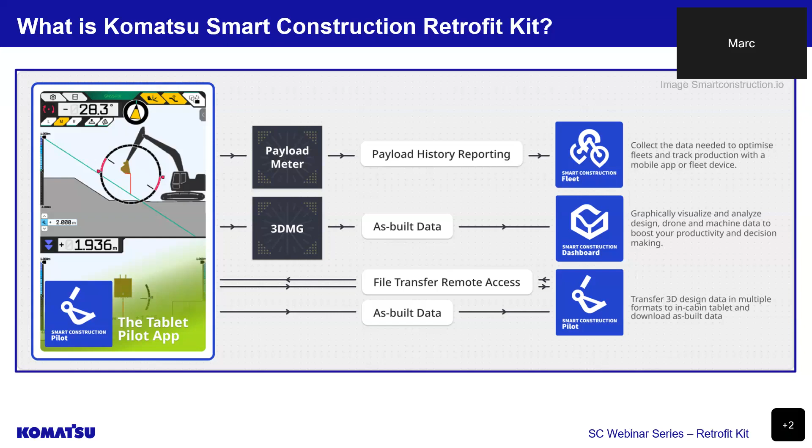From obtaining and collecting data on the machine itself, we're able to provide a history of payload reporting as well as 3D as-built data directly to the server for visualization and processing. Using Smart Construction Pilot Web and Smart Construction Remote applications, we're also able to remotely access the machine for support when required, as well as convert and transfer design data directly from the office straight to the machine.

First and foremost, the system is a fully functional 3D GNSS guidance system, or GPS system, allowing the operator to visually dig to both 2D and 3D line work and 3D surface plans, replacing paper plans, pegs, and string lines in most applications.

Secondly, the system also supports an integrated payload monitoring and reporting system that can help users to load and track material more effectively. The remote management tools allow for remote viewing and controlling the display when required, and importantly, as I previously mentioned, we're able to convert the design data from some common formats, including Topcon, Trimble, AutoCAD. We're able to send them directly to the display with the included mobile modem.

Lastly, a modern feature that is becoming far more commonly requested now is the ability for the system to be able to report on as-constructed data throughout the day's operation, which can be loaded into our data visualization and reporting product called Smart Construction Dashboard, or it can also be exported as raw data for digital twin type applications.

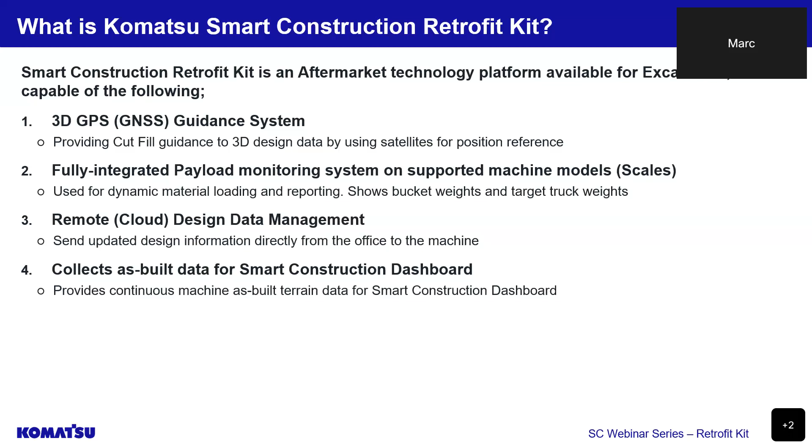Now we're going to drill down into the features, kicking off with the 3D guidance functionality. So those in here that have used machine control and guidance technology in the past will already be familiar with most of the benefits listed on this page. And whilst the fundamental benefits of 3D guidance are shared across the board with Komatsu's IMC, as well as competitor solutions, Smart Construction Retrofit can provide these benefits at a price point where the time to get a complete return on your investment is greatly reduced.

The Smart Construction Retrofit systems put the 3D digitalized plans at the operator's fingertips. This allows the operator to get clear and real-time feedback of the machine's position, or more importantly, the cutting-edge position, against the digital surface and line work. Whilst a control system like IMC will provide automatic hydraulic protection against things like over-digging, the Smart Construction Retrofit system provides visual or audible indication to the operator, which still substantially reduces the risk of over-digging and needing to carry out any rework. It also reduces the material and haulage costs.

A big cost saving that is a lot easier to measure is the system's ability to significantly reduce the survey costs on site, with a large portion of the excavation works and trimming being able to be carried out without the use of pegs, paint, and string lines, with the use of the RTK system. Spend more time moving dirt and less time waiting for the surveyors to turn up on site.

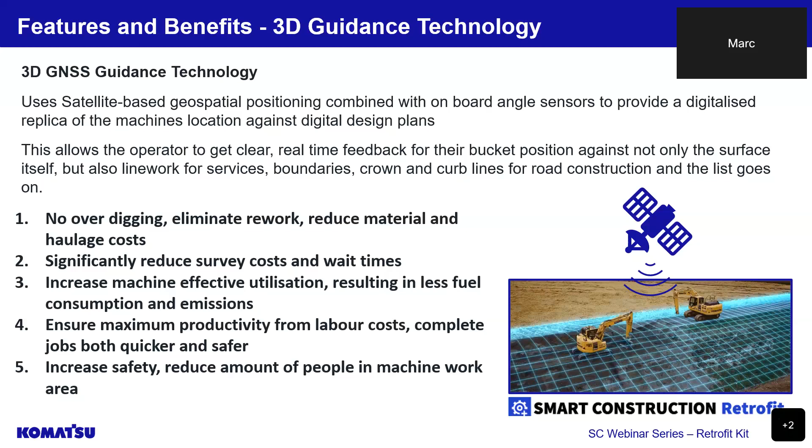We see the payload management system as a critical value add to supplement the 3D guidance system, especially at this price point. The integrated payload system on the Retrofit Kit results in less cab clutter by displaying all the payload functions on the same user interface as the 3D guidance.

The payload system is a dynamic material loading system that uses hydraulic pressure sensors as well as the IMU sensors on the arm to calculate and display per bucket and per vehicle weights, ensuring that vehicles are being loaded to their full potential every load cycle. Later in the presentation, I've got a short video that will demonstrate the use of the payload system.

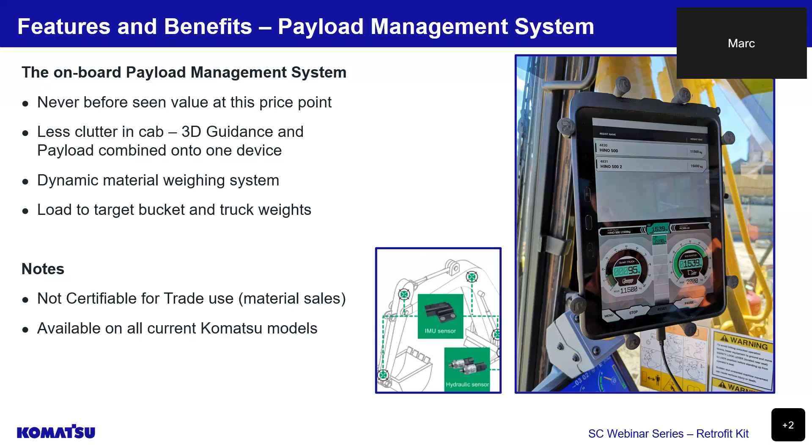Smart Construction Retrofit Kit features a remote management interface called Smart Construction Pilot Web. This tool can be accessed via any browser like that on a PC or mobile device, or actually even on the Retrofit tablet itself. It essentially actively syncs updated information from the controller, such as calibration information for things like the attachments and machine measurements. It also logs system error codes, construction history, as-built data, or any points that are manually saved by the operator. It syncs those directly from the machine to the server automatically.

But the most common use of Smart Construction Pilot Web is actually to upload and convert the project file data, usually the engineered 3D surface and line work, which can then be either downloaded from the application and put onto a USB drive and loaded into the machine the traditional sort of way.

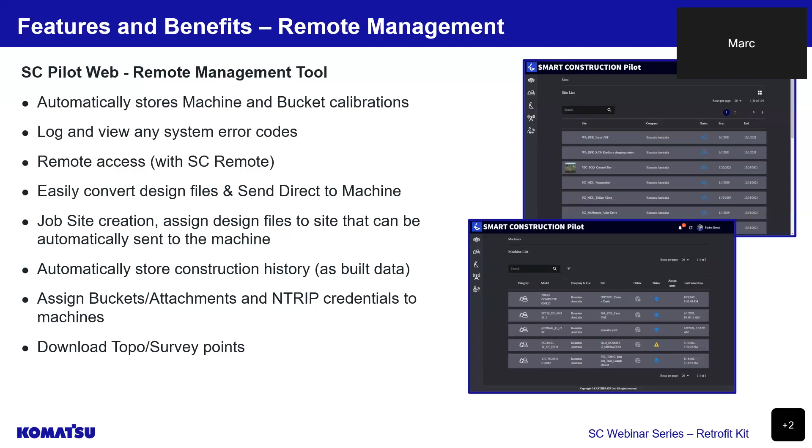But alternatively, a powerful feature here is the ability to send the data directly to the tablet from the web app. And once that data gets received by the tablet, the operator will get a notification to say that new design data has been received. Would they like to switch to the new project, to which they can acknowledge yes or no. When working in busy environments, this feature is key to ensure that the most current design data is available and being used to prevent the risk of mistakes or delays.

We have quite a number of IMC customers out there utilising our industry-leading as-built collection capabilities with that product, all of which are very happy with the data and benefit that this solution provides, but previously this was limited to IMC machines only. With the introduction of the Smart Construction Retrofit Kit, users are able to enable the collection of construction history or as-built data from any machine that's fitted with the retrofit kit. This data can be essential to reducing survey and planning costs during the construction phase.

Smart Construction Dashboard is a powerful tool that will be on showcase in our next webinar in this series. But if you already have an existing digital twin application in mind, the data can be exported directly out of Smart Construction Pilot Web in a CSV format.

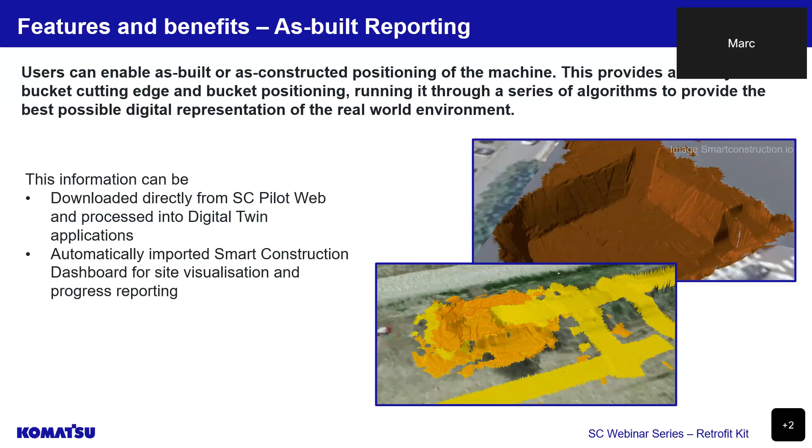Smart Construction Dashboard is our cloud-based site virtualization tool that can be used for tracking construction progress by comparing engineered design data against real-world data through the use of traditional surveying methods, drone surveys, and in this case, machine as-built data collection. Our next webinar will focus on Smart Construction Dashboard in greater detail, but in summary, the retrofit kit will allow non-IMC and non-Komatsu machines to track progress information, which can automatically be sent directly from their machines to the server.

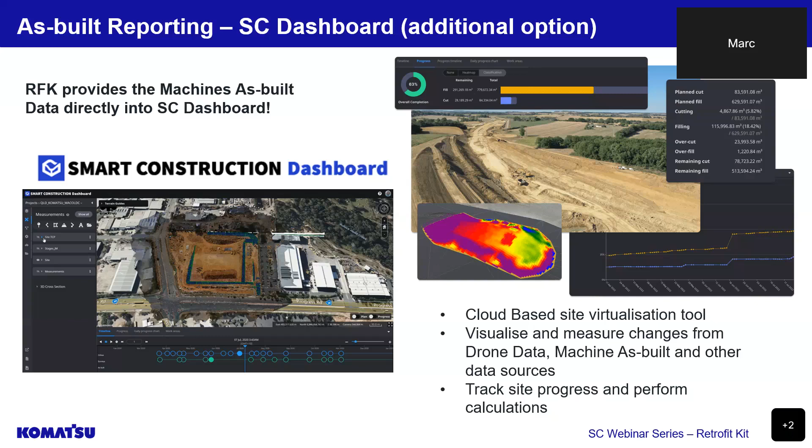So a lot of people ask us, what is the difference between IMC and the retrofit kit? Well, the core difference between these two systems is that the integration portion of the IMC solution allows it to be what's referred to as a machine control system, capable of controlling the hydraulics of the machine to provide various assistance features to the operator. Whereas our retrofit kit behaves more like a traditional excavator guidance system, where the operator remains in control of the machine and cuts to grade using visual or audible indicators.

The IMC system uses factory integrated components such as cylinder positioning sensors, and therefore is only available on very specific machine models. Whereas the retrofit kit uses bolt-on aftermarket components, and as such, it's able to be installed onto a larger variety of machine types, makes, and models.

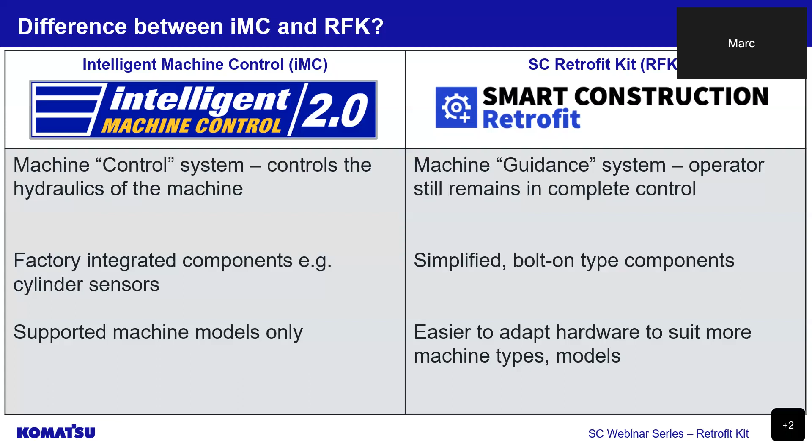It's important to understand that both products have their place at various phases of the construction project. Contractors that experience difficulty in obtaining skilled labor, such as with the ability to trim effectively to tight tolerances, may benefit from an IMC control system. But the retrofit kit will provide accuracy that's identical to that of an IMC system, just requiring manual operator input.

So based on the previous slide, you might start to wonder, why would Komatsu get involved in making a 3D guidance system when we already have factory integrated options available? Well, the answer is quite simple. As we continue to progress into the digitalization of the construction industry, we've identified that as much as we would like every machine on site to be Komatsu yellow, mixed fleets are here to stay, and Komatsu recognizes this. So in turn, we've developed a system that allows contractors to achieve huge digitalization benefits that were previously only available on Komatsu IMC machines across their entire excavator fleet.

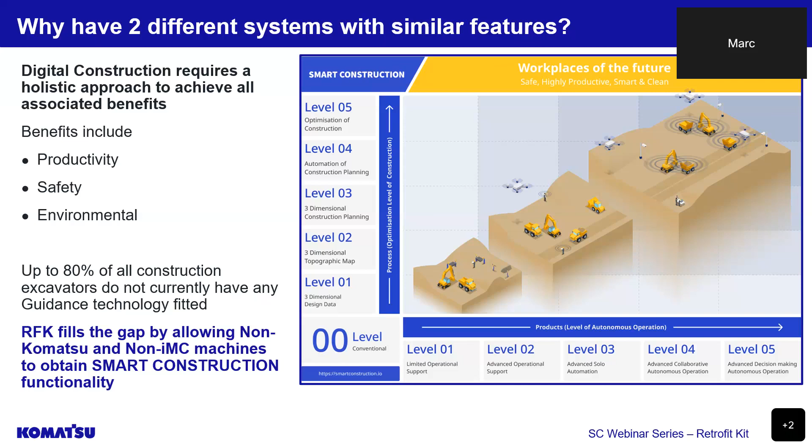So what is digital construction? Well, to summarize, it's an evolving shift from traditional construction practices towards the more sustainable and modern practices seen across other industries. For example, in construction and particularly earth moving, we've often lagged behind other industries such as manufacturing, logistics, and so forth when it comes to innovation and acceptance of new technologies and processes.

On this slide, you can see where retrofit fits into the equation during the execution stages of a project through to finalization, allowing operators to complete their work more effectively while being able to provide up-to-date progress reports through the as-built data reporting functionality. If it all sounds a bit complicated, well, truthfully it is, but smart construction provides simplified solutions to complex problems.

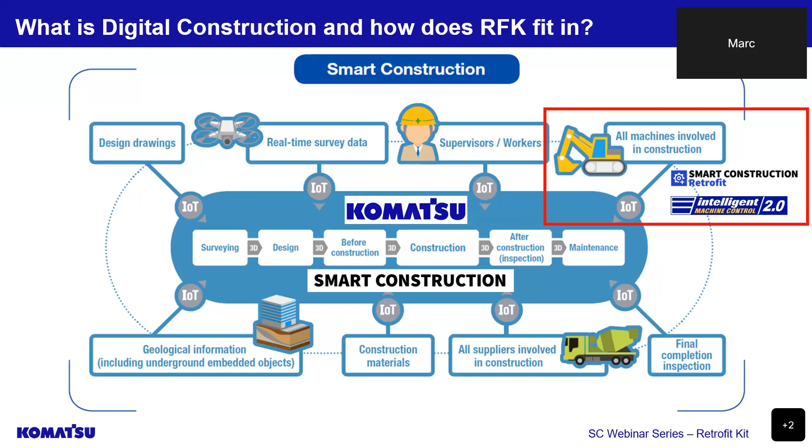Now we'll move on to an overview of new and used Komatsu machines that can be fitted with our Smart Construction retrofit system at special promotional pricing. The system is also designed to be installed onto various other machine manufacturers, and this Komatsu model sizing chart shows where the product is currently available in Australia and New Zealand.

As a general rule of thumb, we're supporting installations from 13-ton up to 36-ton class machines, but we will be expanding installation options to include larger bulk earth moving excavators, smaller utility excavators, and other machine brands in the near future. The payload monitoring function is available on all current Komatsu models shown in this slide.

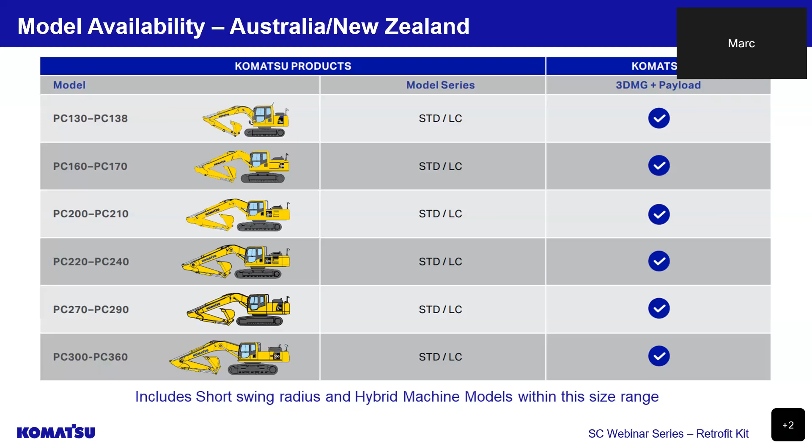Smart Construction RFK system utilizes high accuracy tested and proven components to achieve cutting edge accuracy for a fraction of the cost of market competitors. The image on this slide shows an overview of roughly where the components of the RFK system are fitted onto the machine.

Some attendees might be familiar with using 2D or laser guidance for their excavating. And whilst laser grading systems can provide benefits in some applications, the flexibility and convenience of a 3D GNSS system can be worth its weight in gold. By using the high accuracy GNSS signals to the antennas mounted at the rear, the machine is able to freely move around the job site with accurate cut fill leveling guidance without needing to constantly rebench or recreate the slope or design.

And while a connection to a base station via radio or cellular signal is still required, generally the risk of damage or theft to external supporting hardware such as lasers is mostly eliminated. The high accuracy RTK position is then projected down the boom to the cutting edge using the high-speed IMU sensors, which account for the varying arm position, meaning that your cut fill values will be accurate with the machine positioned essentially anywhere within practical and safe operation, of course.

The IMU sensor data and GNSS signal data are processed on the controller unit, which can be located outside the cab because it uses Wi-Fi to communicate. This significantly reduces the risk of cable damage causing downtime and also declutters the cab as much as possible. The GNSS receiver is capable of tracking all the common constellations available: American, Russian, European, Chinese, Japanese satellites, all available at no extra cost.

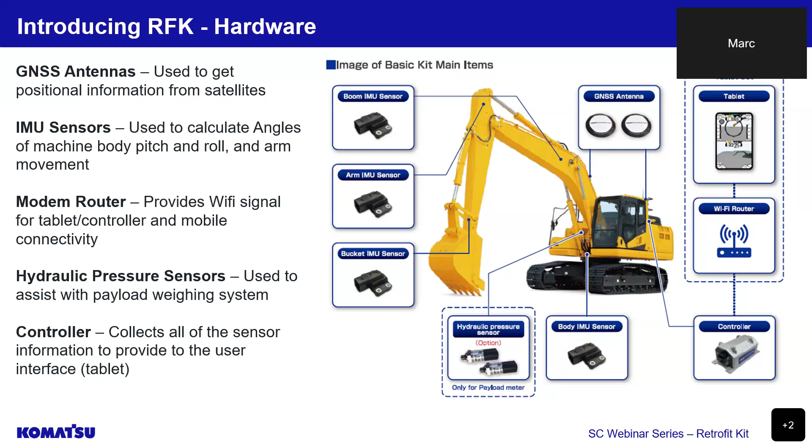Lastly, on the hardware side, but importantly, we have the operator's in-cab display, which is actually just a ruggedized Android tablet device. The tablet device was selected for a few reasons. First of all, ease of use. Most people are familiar with operating smartphones. This solution provides a very similar look and feel to most operators, which reduces the training time for the hardware itself so that operators can focus their attention on learning the software functions.

The tablet also has the added benefit of communicating wirelessly to the rest of the system, which means the tablet can easily be removed at the end of shift and data can be loaded directly into the tablet back at the office if required. It has good brightness for in-cab visibility and internal speakers, which can be used for audible grade tones.

Another benefit, which isn't actually often mentioned, is that the replacement cost of the Android rugged display is about 1/10 of that of some market competitors, meaning that when accidents happen, like theft or vandalism, you're left far less out of pocket to get back up and running again. It is, of course, a rugged device, but believe me when I say that no screen will survive being run over by excavator tracks. I've seen it happen too many times, unfortunately.

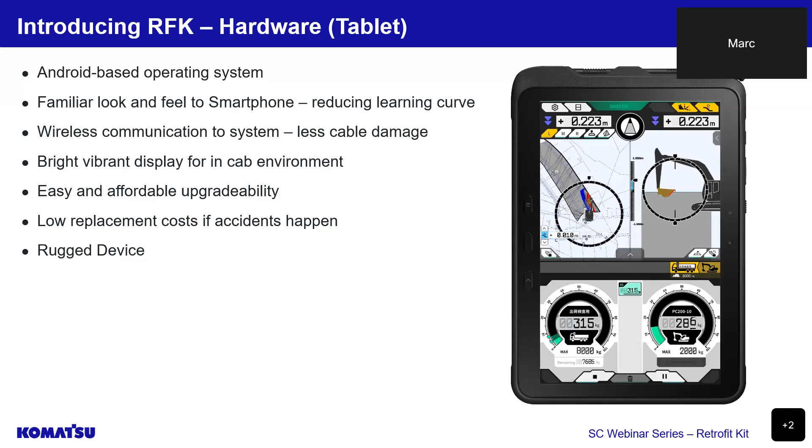So as great as all the hardware may sound, no system is complete without an easy-to-use, reliable user interface for the operator to work from. In fact, as the competitive landscape in the 3D machine guidance market continues to heat up, the software usability and features are what operators are becoming drawn towards the most. You want software that has a short learning curve, powerful but easy to use functions, and easy access to these functions without having to scroll through menu after menu.

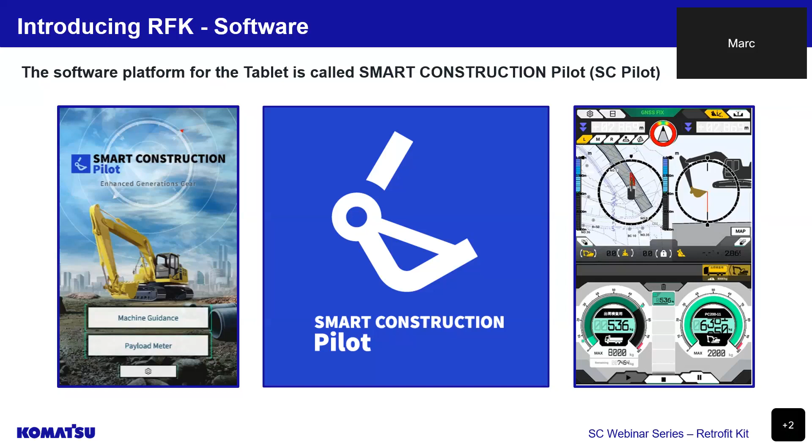Technology utilization has a direct relationship to the usability of the software. So Komatsu and Smart Construction have put a lot of effort into the design of the user interface. I won't spend too much time going through all these functions and features one by one, but the main thing to note from this slide is that the most common features and functions required from an operator when using the system are actually within one button press of the main screen. Too many menus and options and features creates a lot of confusion, and in some cases actually causes hesitation in adopting and using the technology.

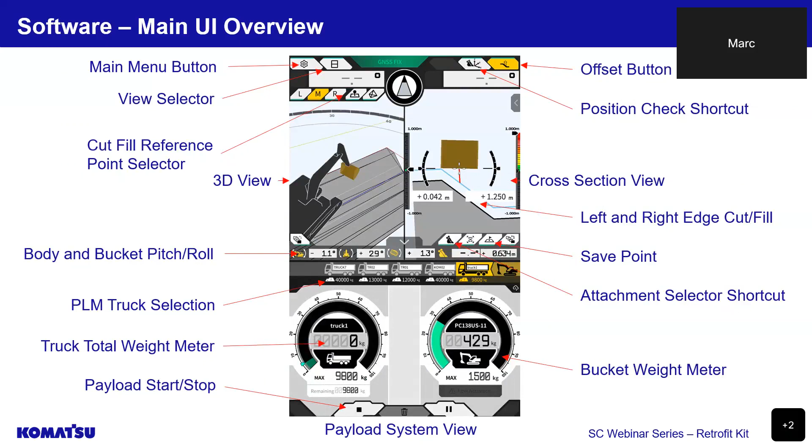For those wondering, we do offer the ability to show the payload system in full screen, also the ability to remove the payload pane from the 3D guidance screen, which results in larger and easier to read interfaces depending on the task at hand. It's very easy to switch between these display modes with just a single button shortcut on

the main screen. The colors of the line work and the surface can also be changed in the project settings, and the line work can be colorized as per standard survey set out color codes. It can also be viewed in 3D, which can be useful for mapping underground utilities.

You can see on the right-hand side, there's an example of a dual screen view with a cross-section up the top and profile view down the bottom. The cross-section view features left and right cut-fill light bars, left and right cutting-edge light bars, which can be scaled in size to make it easier for viewing.

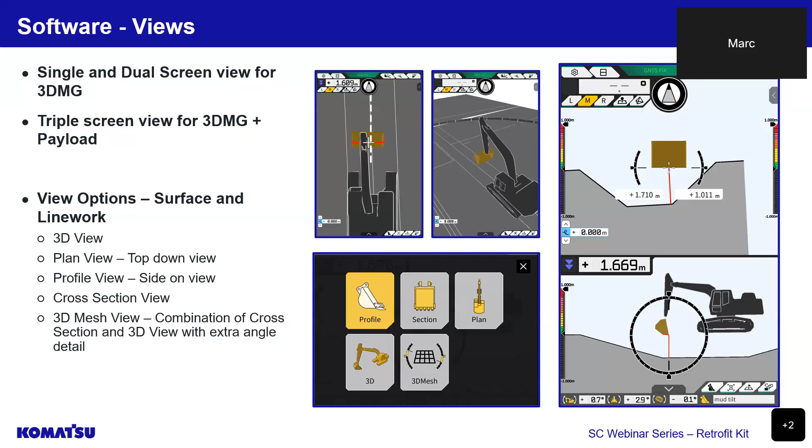The cut-fill information is displayed clearly for the left and the right side bucket edge on cross-section view, but also in larger text in the middle of the screen with an up or down arrow indicator. The surface can be offset either directly vertical or perpendicular to the design surface and will depend on the application.

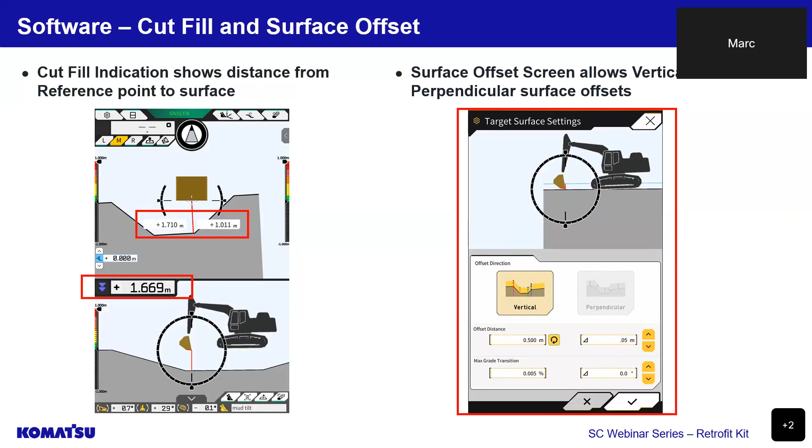Surface offsets are often used to avoid using multiple surface layers for tasks like boxing out roads, removing topsoil, and so forth. And the vertical offset moves the design surface up or down according to the operator's specifications.

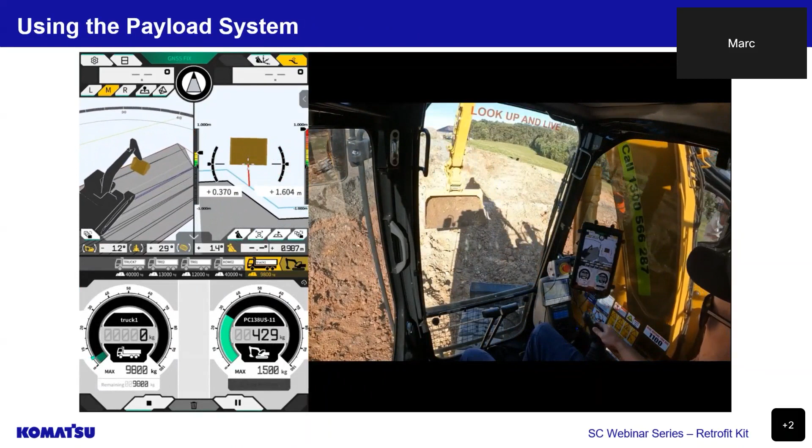This quick video demonstrates how the payload system can track bucket and truck loads on the same interface. In the middle of the screen, there is a vehicle or truck selector. Just tap the name of the vehicle and the target weight will be updated and shown on the left-hand lower side of the truck weight meter.

Sorry. The right-hand meter shows the individual bucket weight against maximum weight capacity of the bucket, and these parameters can be defined in the settings menu. As the boom is lifted, the bucket weight is calculated, and once the load is tipped off, the system will automatically register that bucket load to that vehicle.

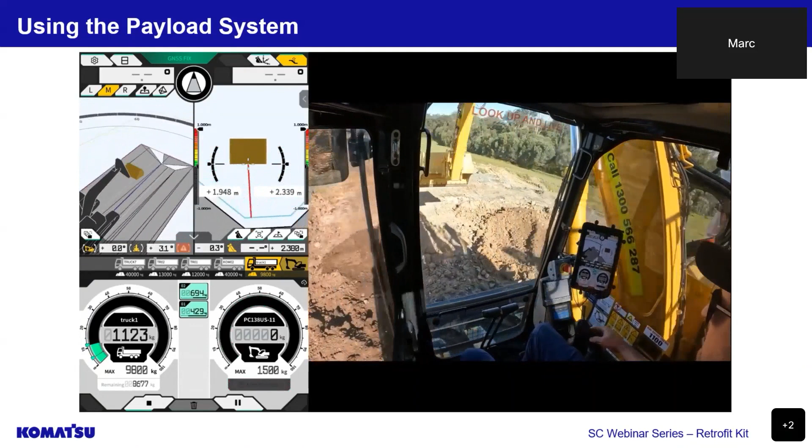The payload information is then uploaded to Smart Construction Fleet Lite server as soon as the vehicle load is finalized using the stop button. Using the Smart Construction Fleet Lite app, the vehicle weights are able to be displayed directly on the web interface, or they can be downloaded into a simple CSV format for import into any third-party applications if required. The data, of course, can be filtered and sorted by the parameters shown in those overlays.

The screenshot might be a little bit hard to see on the presentation, but the Smart Construction Fleet Lite app is very easy to use and can also be used to configure the truck parameters, which then get synced from the web app to the operator's tablet.

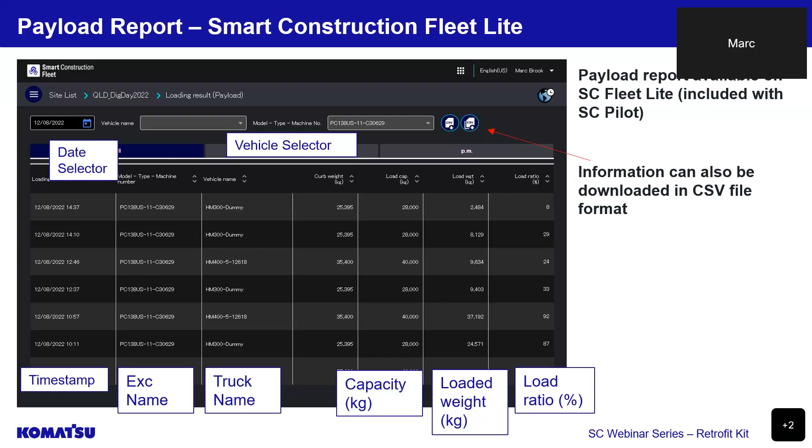We have a few additional hardware options available for RFK at the moment, and these items are at additional cost on top of the base machine kit. The UHF radio option is required for any machines running off a local base station running a UHF radio. The base system will support network corrections only, and if you need a radio, you'll need to include this option.

If you don't know if you need a radio, the supervisor or the survey team on site should be able to provide some advice here. It will save you a few $1,000s if you don't need it, but I'd usually recommend getting this option as standard if your machine tends to move around a lot.

The tilt bucket and tilt hitch kits are additional IMU sensor, cabling, and bracketry that are required to obtain the accurate cutting edge position when tilting the bucket. This will ensure your bucket position is always on the money for slope and batter work.

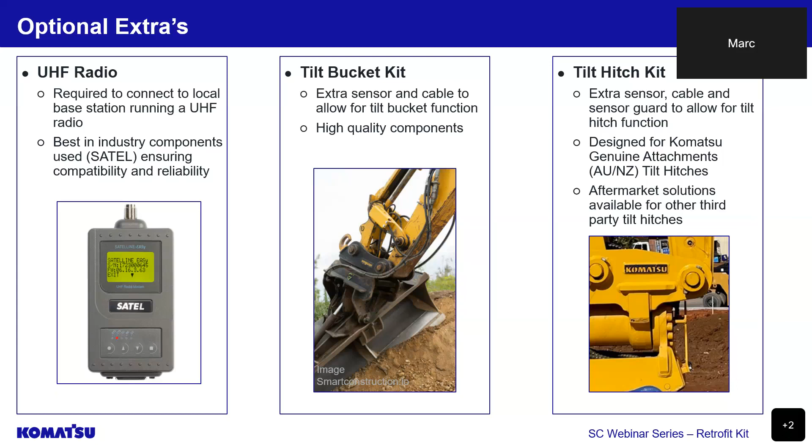If you're completely new to this technology side, it's definitely a lot to take in. But with Smart Construction Solutions, we try to make everything as simple and intuitive as possible.

To get a high precision position, you'll need to connect to a base station, whether via the UHF radio option we just discussed, or using an NTRIP network. If you don't know where to start, our team can help point you in the right direction when it comes to base station connectivity. You'll also need some machine-ready design data, which usually comes in raw form like AutoCAD data, and preferably excess detail should be removed from these design plans, things like excess landscaping information and irrelevant line work, just to clear things up for the operator a little bit.

The design data will also be made in a specific coordinate system, which must be known. We support most common projections and geoids, and we can also convert Topcon and Trimble localization files for use when required.

At a bare minimum, if you're connected to a base station, you're able to create flat and sloping plane surfaces, using the bucket position as a reference point. This is very useful for completing tasks where the engineered design data may not yet be available.

If you're looking at the slide and you're new to the technology and thinking this is way too complicated, where do I even begin? This is why we include 12 months of gold phone support through our dedicated Smart Construction Support Centre on all RFK system purchases. We're here to help, and we have some absolute wizards on the phones that can help support you when you need it the most.

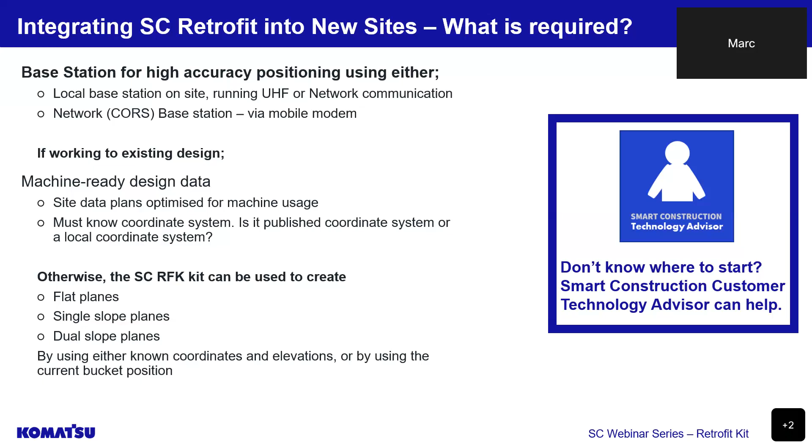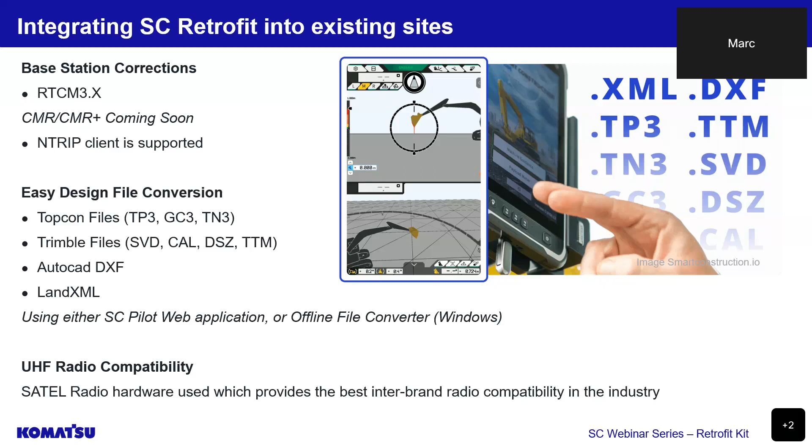The Satel UHF radio option that we discussed earlier is by far the best in the industry option for base station connectivity and compatibility across the board. But technically, the system will support any radio with a serial output. So if 900 megahertz is required for your site, our team can help you get up and running.

As part of our commitment to providing the best aftermarket product support for our customers, our team visited Brett Evans in the Hidden Valley Estate in North Queensland. Brett purchased a used PC200-8 fitted with Retrofit kit and was one of our initial customers to commit to the technology investment of our Retrofit kit in this region. More than 6 months after taking delivery of the machine, let's hear what Brett has to say.

Hi, my name's Brett Evans. I'm from Hidden Valley Estate, and we're up here with our PC200 in the heart of the Whitsundays. Hidden Valley is a rural residential subdivision located between Airlie Beach and Proserpine. We've been planning this estate for the last 20 years, with our first stage developed in 2019. We made the decision to form our own construction team so that we could build the stages ourselves, and we purchased the PC200 with the Retrofit GPS, which formed part of our fleet.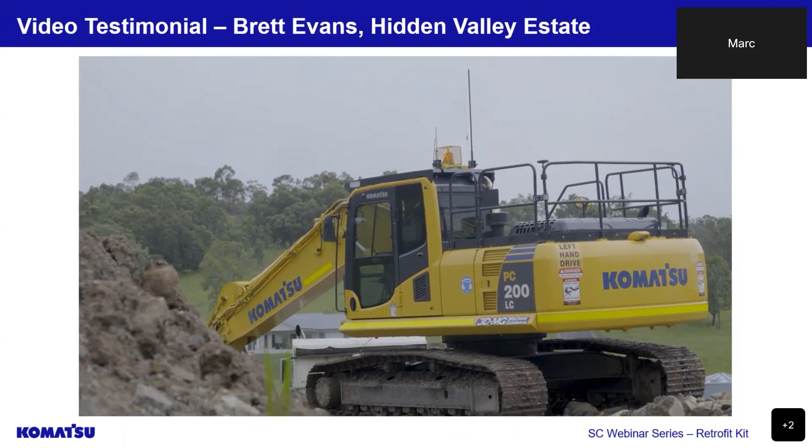The features of Hidden Valley is it adjoins Conway National Park, which has its own constraints, being the terrain and the vegetation. Having one of the oldest fig trees in Australia, it's in our best interest to look after not just a national park, but our estate, and having the PC200, the Retrofit GPS kit, enables us to have the confidence and a level of accuracy that we can construct in these areas without requiring a full-time surveyor on site. We are quite remote out here, but from when we fire up the machine in the morning, the system's ready to go.

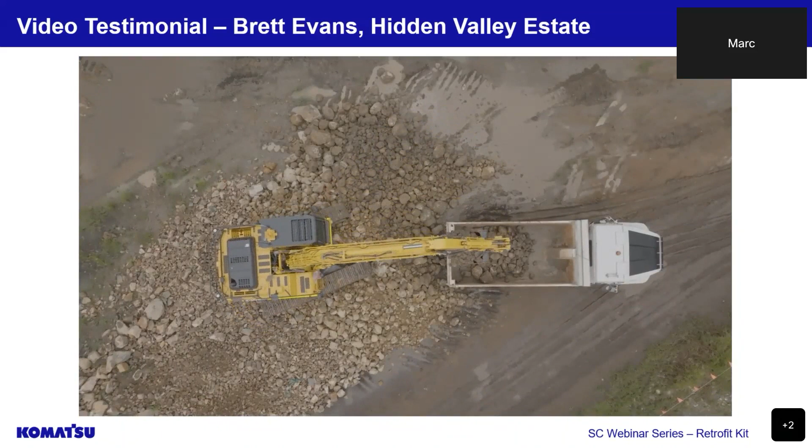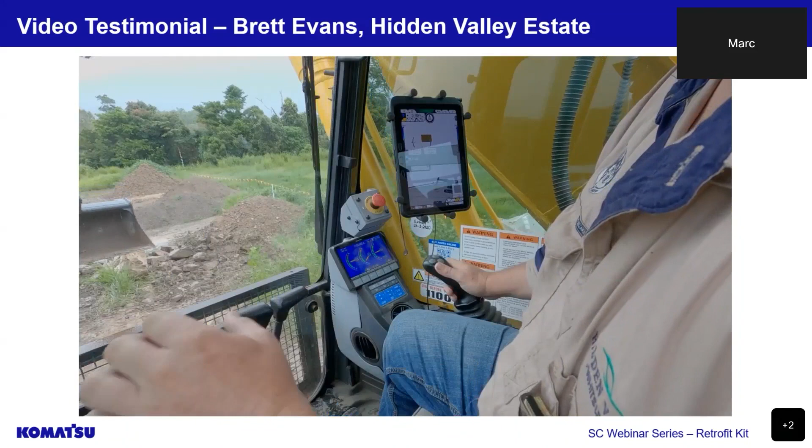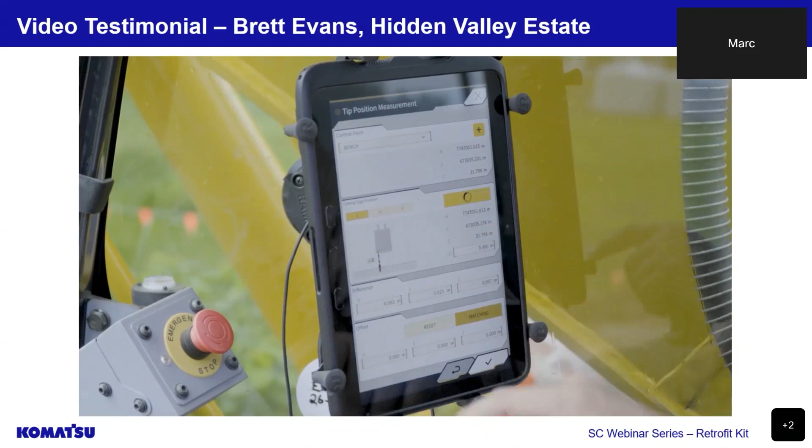Having the Smart Construction Retrofit allows our operators to achieve millimetre accuracy in all parts of our operation, including trimming, positioning and benching. The PC200 is the perfect machine for us to tackle site cuts, drainage, access roads and a wide range of other unique works within our estate. Having the PC200 with the Smart Construction Retrofit allows us to run a small crew without having to have string lines, pegs and other survey requirements that can all be done from the machine.

The main benefit with this system is time, from the auto tip-off feature when loading trucks, to productivity and efficiencies. In an area where we do have poor service, the connectivity is always great.

We've chosen Komatsu for its reliability, but in the rare instance where we do have issues, we know we've got the support from our local Komatsu team, and the machine has the ability for the Komatsu team to log in remotely to identify and address any issues. I know our team can pick up the phone anytime and speak to someone from Komatsu who understands the machine and can help us work through the issues so we're back operating as quickly as we can be.

We've had Komatsus for over 20 years. The reliability of the machines and the support we've always had from Komatsu made the decision to purchase the PC200 for this project a no-brainer.

Before we wrap up the presentation and head to a Q&A, I'd like to speak on some additional benefits that are not necessarily mentioned on any brochures. Firstly, even at this price point, we are able to utilize quality components.

And because the system is globally backed by Komatsu's parts and service network, we can support this technology anywhere our machines go. Our branch and field service technicians are constantly undergoing additional training to supplement our technology product offerings, meaning that we can actually be much more effective at resolving issues than a lot of our competitors in this space due to our support footprint.

Our nationwide parts and service network will ensure that your investment into this technology doesn't lead to excessive travel costs and wait times just to get to assistance where you need it.

Secondly, one of Komatsu's core values, which actually coincides with what you see in our machines, is our commitment to push the boundaries on what's possible by taking our customers' voice on features and functions that can make their life easier.

We touched on it a little bit earlier, but we also offer the best technology support network in the industry, consisting of technology advisors and our smart construction support call center. Don't be left in the dark, reach out and let our Komatsu technology advisors help.

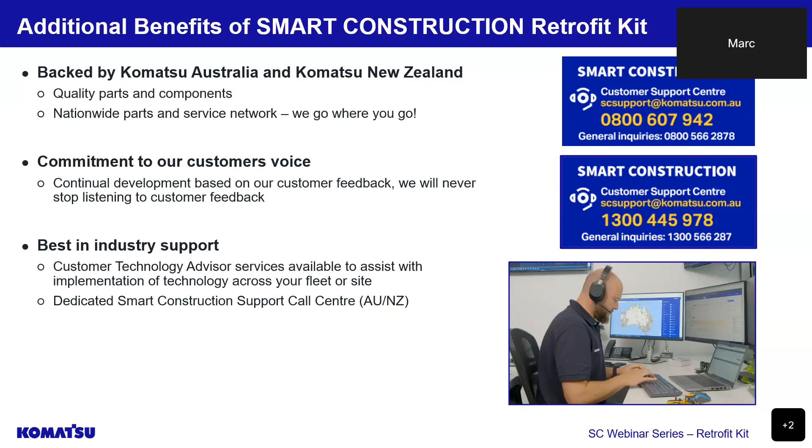For anyone attending Diesel Dirt and Turf this Friday, Saturday, Sunday at Sydney Dragway, Eastern Creek, you'll be able to get a hands-on demonstration of the RFK product, as well as other smart construction solutions. If you aren't heading to DDT, we have a number of Komatsu rental and other demo machines throughout Australia and New Zealand fitted with our RFK system, and our team will be happy to arrange a walk-around demonstration or a remote demonstration, whatever suits you. Just reach out to your local rep and we'll go from there.